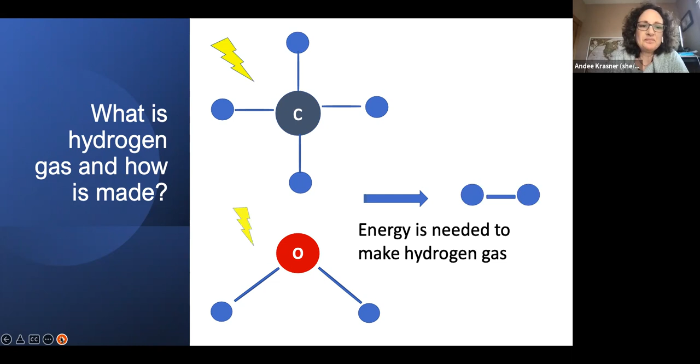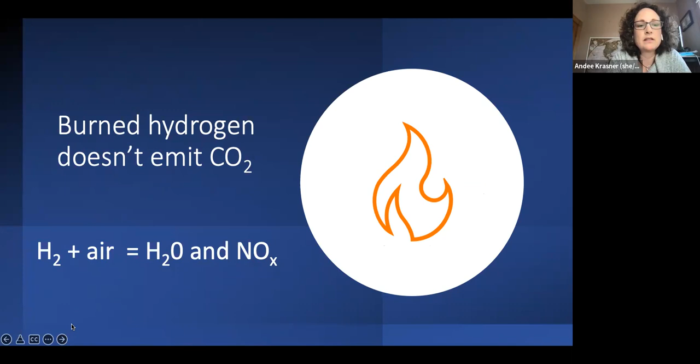So when you burn hydrogen, it actually doesn't emit any carbon dioxide. So hydrogen is often called a non-emitting fuel because it doesn't emit any carbon dioxide. But when it is burned, you get byproducts of water and nitrogen oxides. So while hydrogen doesn't produce any carbon dioxide, that really isn't the whole story. The way in which hydrogen is produced is really where the emissions come from. And so it can be produced in a clean way and it can be produced in a dirty way or from fossil fuels.

So there's three main pathways to make hydrogen gas, and hydrogen is named differently for each method of production. We're going to talk about gray, blue, and green today, but there's a lot of different colors. There's pink, there's yellow, there's brown, there's turquoise. We're going to stick with the three main ones, gray, blue, and green.

So gray hydrogen is made from methane gas using a process called steam methane reformation. In the steam methane reformation, methane reacts with steam under pressure to produce hydrogen gas, carbon monoxide, and carbon dioxide. This process obviously requires continued use of methane, which when leaked into the atmosphere has a very high global warming potential. Over a 20-year period, methane's global warming potential is 84 to 87 times more warming than carbon dioxide.

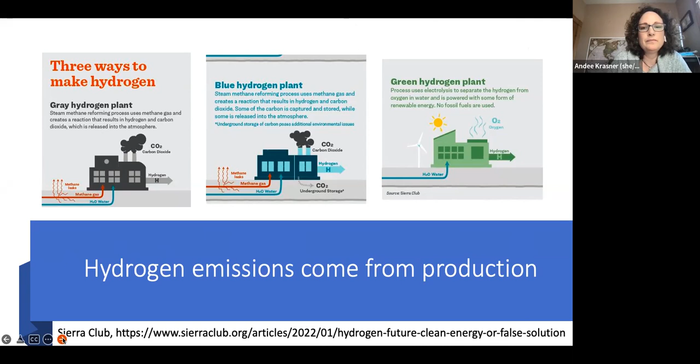So here's the problem. 99% of hydrogen produced in the US is made from fossil fuels. And while we are very excited that more green hydrogen is in the pipeline, it just isn't available yet. And when it does become available, it will be incredibly precious. It's the energy equivalent of caviar or gold. And so we need to make sure that we use it in a very specific way.

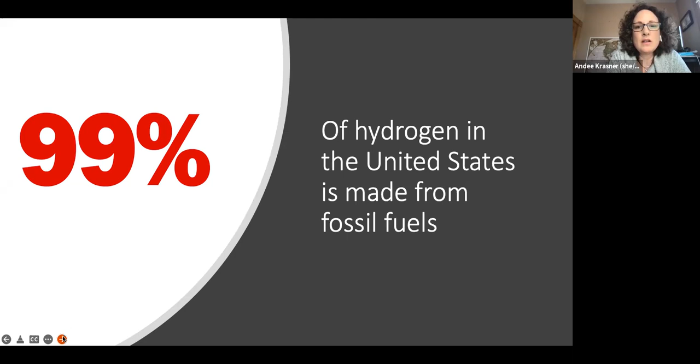Next slide. So before I started learning about hydrogen, I did not know that we produce so much hydrogen in the US already. We produce about 10 million metric tons of hydrogen every year in the US, and it's a key ingredient in fertilizer, which makes ammonia, which is the nitrogen with 3 hydrogens on it (NH3). So it's ammonia, and it's made from hydrogen gas.

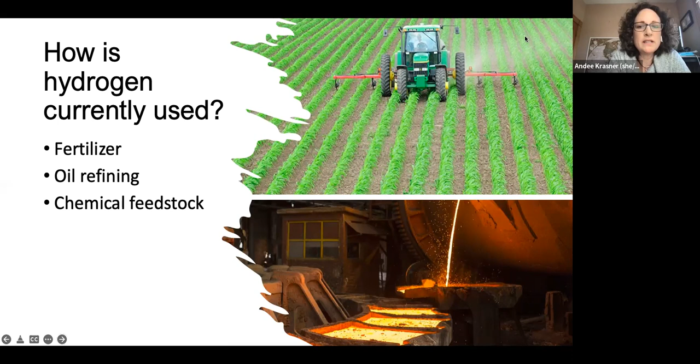It's also used in oil refining and as a chemical feedstock for other important things like methanol, which is then in turn used in a ton of different products like plywood subfloors and solvents and windshield washer fluids.

Next slide. So the carbon impact of the hydrogen that we make worldwide is 830 million tons of carbon dioxide equivalent per year. This is the same amount of emissions as 2 Californias. And California is the 6th largest economy in the world. So this is a lot of carbon that hydrogen is already impacting our climate with. Next slide.

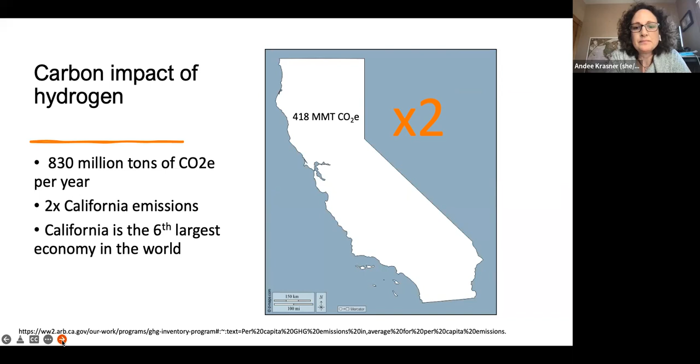So just to put it into context as to why gas utilities want to use hydrogen, there's mounting pressure on gas utilities to reduce carbon dioxide and fugitive methane emissions to meet both international and national climate targets. As you may recall, the US rejoined the Paris Agreement, and as part of that committed to reduce methane emissions by 30% by 2030. And the latest IPCC report stated that we have to reduce fossil fuel use quickly, and they named methane as a really important gas to focus on.

And in some states like California and Massachusetts, states have emission reductions mandates that fossil fuel companies and gas utilities are having to figure out how to be in line with. Next slide.

So gas utilities basically have a lot of pipes in the ground, and they deliver gas to us, and their job is to deliver it as safely as possible. So when they're asked to reduce their carbon impact, they're looking at ways to leverage their current infrastructure using the pipes that they have in the ground.

And what they are proposing right now, at least in Massachusetts, is to use biogas, which is methane, to use synthetic gas, which is gas made from hydrogen, and it's methane, and then to use hydrogen to reduce their emissions.

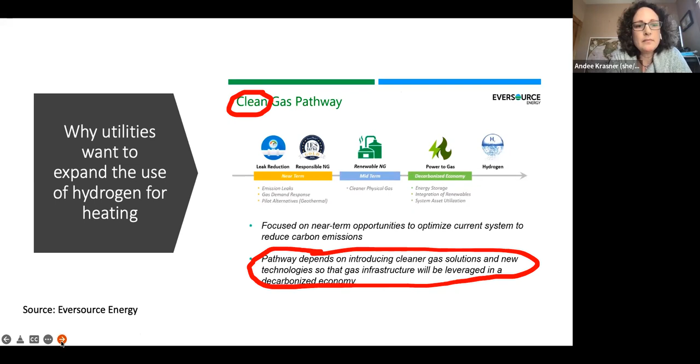So I'm going to talk to you about the impacts of using fossil hydrogen in our natural gas system. Basically, it's going to increase greenhouse gases. It's going to lock in the methane gas system. It will waste renewable energy, and it will increase costs for consumers. There are safety concerns about putting a highly explosive gas into people's homes and into people's businesses. And it will perpetuate health inequities from air pollution that comes from the methane gas system. Next slide.

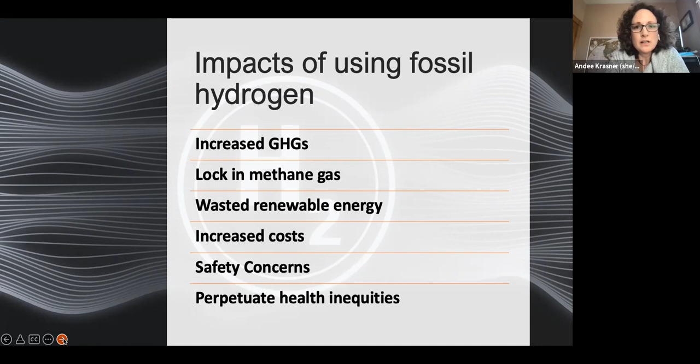Furthermore, when you use hydrogen in pipelines, it embrittles them, it makes them hard, and that makes them more likely to crack. And so we're going to get more and larger cracks, which means more leaks of methane in our system. So we already know that our gas system is leaking all over the system, and that it's leaking worse than what's reported to the EPA. So we don't really want to put hydrogen in these pipes where it can cause additional leaks. Next slide.

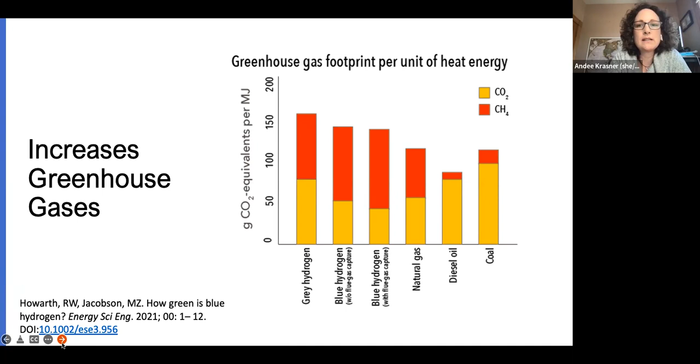So it's going to be blue hydrogen in the best case scenario, and gray hydrogen in the worst case scenario. We are going to increase that demand for fossil hydrogen, and that in turn will increase the demand for the methane needed to make that fossil hydrogen. So you need about 1.3 times more methane to make hydrogen to deliver the same amount of heat. We're also going to maintain our current system, which is 80% methane in the pipes. And the public will be assured that methane is fossil-free energy, or they'll be assured that it's decarbonized because hydrogen doesn't emit carbon when burned.

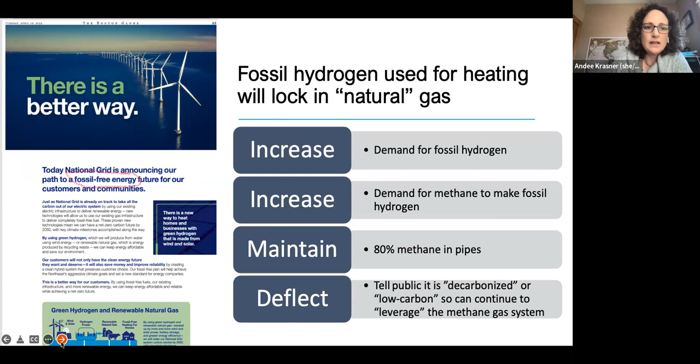But these are really just sleight of hand, doublespeak for hiding the reality behind what is happening when you mix methane with fossil hydrogen. Next slide. So green hydrogen is pretty great. Why isn't it an option for blending with methane for heating and cooking? And we're specifically talking about blending it for heating and cooking. There are other great uses for green hydrogen. Remember, I said it's like caviar, and we're going to talk about that a little bit more. Next slide.

So like I said, there's no green hydrogen available. Less than 1% of all hydrogen is green right now. The US government is trying to ramp up the availability of green hydrogen and bring down its price to $1 per kilogram by 2030. But even those projects that are planned won't have enough green hydrogen to use for heating until 2040 or beyond. So if we use renewables to make green hydrogen, there can be a trade-off. Those renewables don't get used to green the grid. So we need to build a lot more solar and wind to get to a zero carbon economy.

And thirdly, even if we had enough green hydrogen, you can only blend it up to 20% safely. After about 20%, the appliances which were designed to burn methane have to be replaced or retrofitted. You have to have appliances designed to burn a blend of hydrogen and methane or 100% hydrogen. So you're going to have to replace all of these appliances. Next slide.

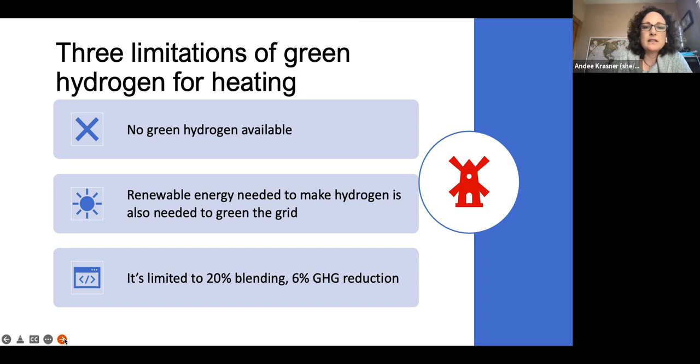So let me explain the 20% blending issue a little bit more. Hydrogen has the highest energy content by weight of any fuel, but it has a comparatively low density. So it requires greater physical volume for the same energy as other fuels. So that means when we actually replace 20% of volume of methane with hydrogen, it actually has less energy content. It's only about 7% of the energy content, even though it's 20% volume.

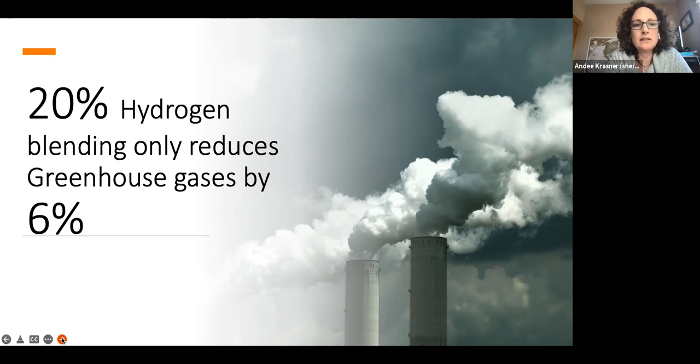And the difference in this density also means that there's not a linear relationship between volume and greenhouse gas reductions. So it sounds like a large blend, a 20% blend, but you're actually only getting at most 6% reduction in greenhouse gases. And that's probably less when you consider the additional leaks that you're gonna get in the pipelines. Next slide.

So once we get to more than 20% blended hydrogen, we either need to switch to electric appliances or we need to switch to hydrogen. And when we're thinking about hundreds and hundreds of buildings, efficiency becomes very important. So when we look at efficiency, we find that the same unit of renewable energy is used 5 to 6 times more efficiently than hydrogen. And what this means is that we build less renewables to power the same number of buildings if we're using more efficient appliances.

So remember when I said green hydrogen is like caviar, and using it to blend with natural gas is sort of like throwing caviar in soup. We have better ways to use this green hydrogen and the renewables from which it's made. It's better to use these renewables for electricity for powering heat pumps. And the pace of renewable installation will be insufficient to meet both the increased demands of electrification and putting hydrogen in pipes. Next slide.

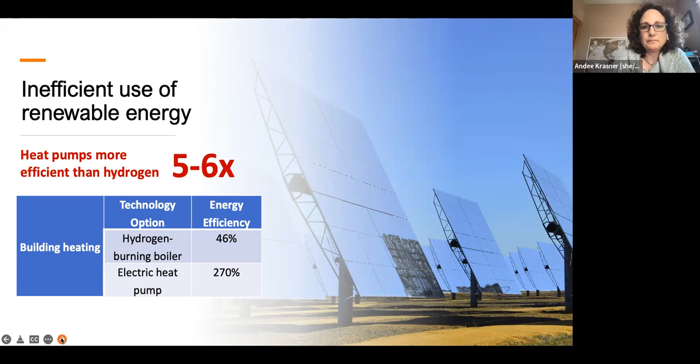So people who are engineers and know a lot more about hydrogen than I do put together this really nice ladder. At the top of the ladder are basically unavoidable uses of hydrogen that we absolutely need to use it for. You can see fertilizer is at the top. And then you can see things like long haul aviation, shipping, and steel. At the bottom is domestic heating.

So why are gas companies all over the United States pushing hydrogen if it's not really a great use of it? Well, in the end, it helps their bottom line to expand the use of hydrogen, which is really only used in industrial sectors now, because, as I said before, it increases that demand for the natural gas, which is used to make it. Next slide.

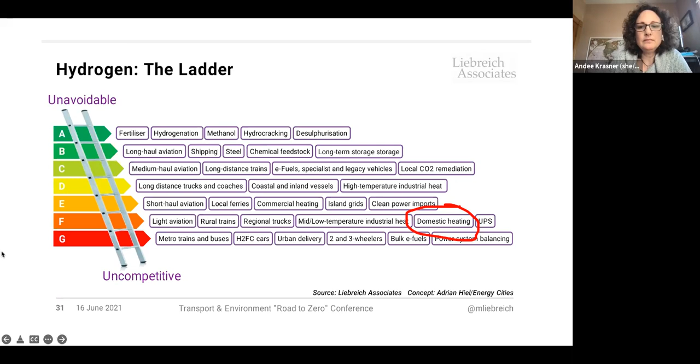So hydrogen is much more expensive than methane gas, and it always will be, because gray and blue hydrogen are made from methane, right? Gray hydrogen is the least expensive, but blue hydrogen, where you have to capture the additional carbon and store it, is more expensive. And currently green hydrogen is the most expensive. So if we start blending hydrogen, it's going to increase consumer costs.

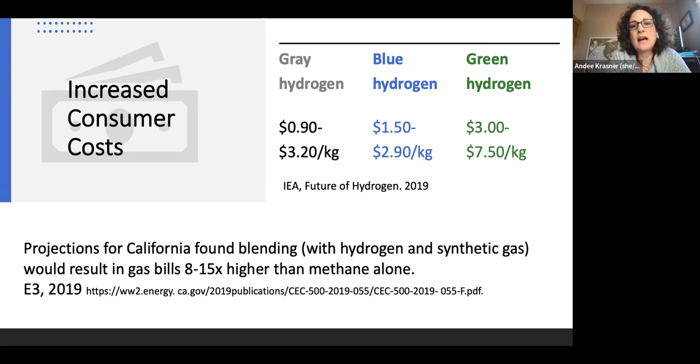And it's not just the gas itself that's more expensive. You have higher delivery costs. The energy of pumping a lighter gas is significant when you start needing to move that gas across the country. And that can make the cost of gas bills 8 to 15 times higher than methane alone if you were to blend hydrogen or synthetic gas, which is made from hydrogen. Next slide.

And like I said before, with blends above 20%, consumers are also going to be on the line for replacing all their appliances because they can't burn blends above 20%. Next slide.

So the thing about hydrogen is it ignites a lot more easily and it's much more explosive than methane. So we're going to blend it and we're going to pipe it into people's homes. And the gas companies are saying that they can do this safely, but there's a lot of infrastructure that has to be put in place to actually use hydrogen safely. So when you go beyond 25% hydrogen in fuel, in most places in the world, you're no longer going to be able to use the same equipment.

Electronics, for example, have to be explosion proof. And there should be no sparks, because hydrogen ignites with almost any air to fuel ratio. I just can't imagine a kitchen or a household with no sparks whatsoever. I mean, just think about lighting birthday candles for children. Next slide.

Go ahead and push play on this. I'm going to try to show you what a flashback is. One of the problems with hydrogen is when you blend it with methane, it increases the risk of a flashback.

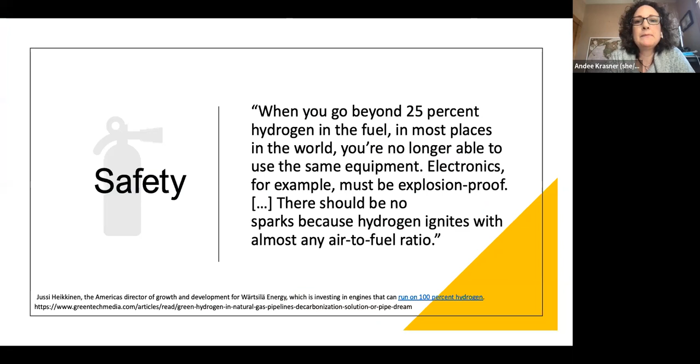Basically, what happens is the flame is just quickly extinguished, but the gas continues to flow. And the flashbacks can lead to appliance shutdown, damage to appliances, and they're a safety hazard because the gas leaks in enclosed areas. So because hydrogen can ignite at almost any air to gas ratio, a leak could mean a fire or an explosion. Next slide.

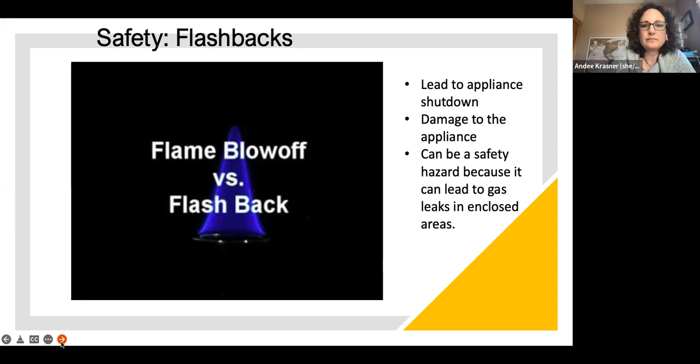So the other thing about a 20% blend of hydrogen is that it still is 80% methane, and burning fossil fuels in the residential and commercial sector right now is responsible for $205 billion in health impacts. These are in premature deaths. The authors of this are from Harvard, and they did not include hospitalizations or any additional medications that people may have to incur.

Sorry, I'm getting a call and my computer is just making everything go away. Just 1 second.

So anyway, you can see that the costs of continued use of the methane gas system are substantial to health. Next slide.

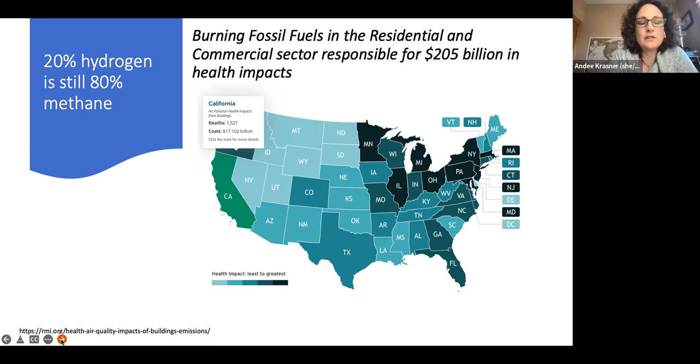Hydrogen will also perpetuate existing inequities. Communities of color are disproportionately exposed to air pollution from buildings. They're actually exposed to air pollution in almost every sector except for agriculture. And what this means is that because they're exposed to high levels of pollution, they also disproportionately get sick from air pollution and are likely to miss school days, work days, and have underlying illnesses associated with this pollution. Next slide.

Hydrogen will increase nitrogen oxides and perpetuate these existing inequities. Nitrogen oxide is one of the main air pollutants from steam methane reformation. So as production of hydrogen ramps up, so will NOx. And when burned, hydrogen releases 6 times more nitrogen dioxide than methane alone. So as the blend rates increase, nitrogen oxides are expected to increase.

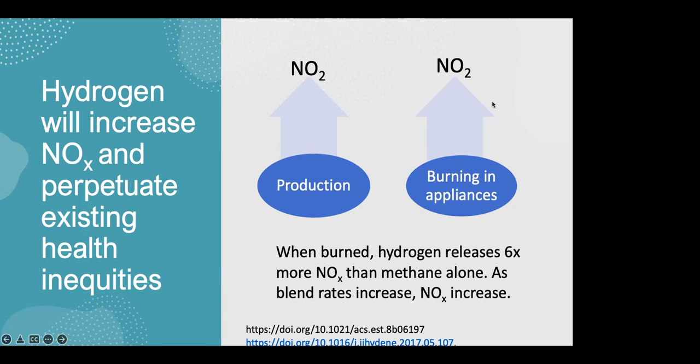And as you may know, nitrogen oxides are a precursor to particulate matter and ozone, which are associated with worse symptoms of asthma. So we don't know specifically how hydrogen blending will affect indoor pollution from gas stoves. Those studies are still ongoing, but we do know that with the limitations on hydrogen blending, 80% of the gas will be methane and just perpetuate the existing inequities that we have. Next slide.

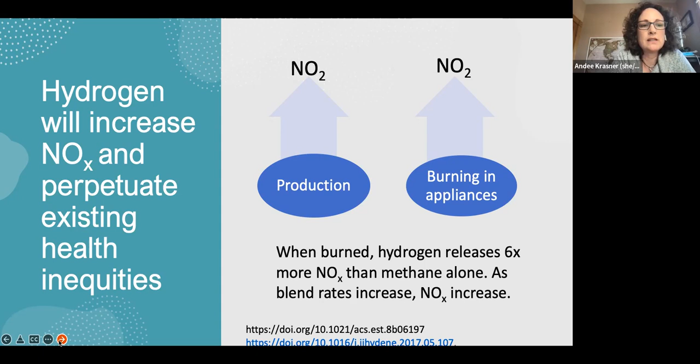Climate change, health inequities are also magnified by climate change, and making the reductions in greenhouse gases is just a necessary element of our pursuit of health equity. Next slide.

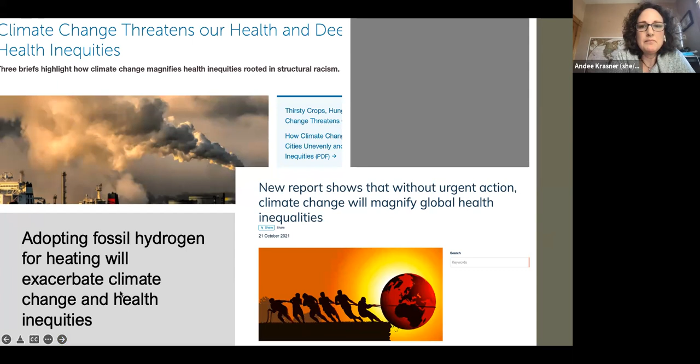So the most cost-effective, healthy, lowest emission path is to use green hydrogen for hard to electrify industrial processes and to invest in electric options like heat pumps for heating and cooling. Next slide.

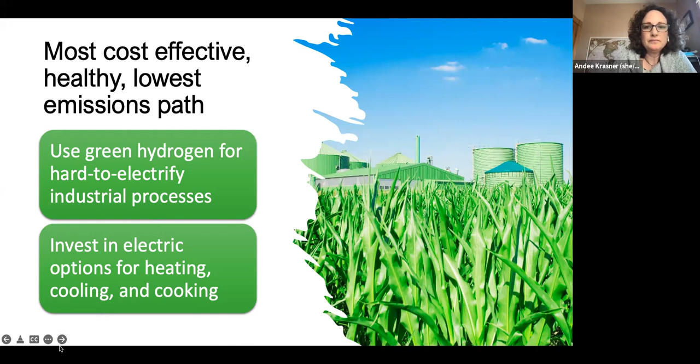So these are just some policy recommendations. We want to promote and expand electrification and the direct use of renewable energy to heat buildings. We want to require environmental impact assessments, comprehensive health impact assessments, and cost effectiveness analysis of new hydrogen infrastructure in comparison to clean energy before it is installed, and require accounting of the full life cycle greenhouse gas emissions of fossil hydrogen, and require the certification of green hydrogen and reserve green hydrogen for difficult to electrify industrial purposes.

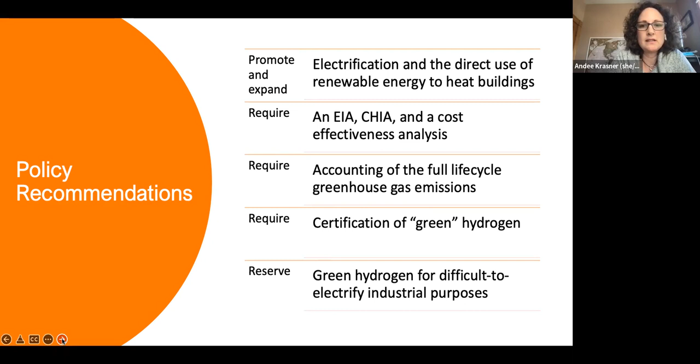Next slide. So thank you for listening. This is my first time giving this presentation, and so it'd be really helpful to me to hear what you found confusing and what you found helpful, so that I can continue to improve on this presentation, and also just to answer any questions that you have. And then afterwards, I will give you a presentation about the GeoGrid, which is a different future that we can envision for the gas system, and one that's a little less explosive and also healthier.

Yeah, sorry. I was trying to find a way to get off mute. Thank you so much for that.

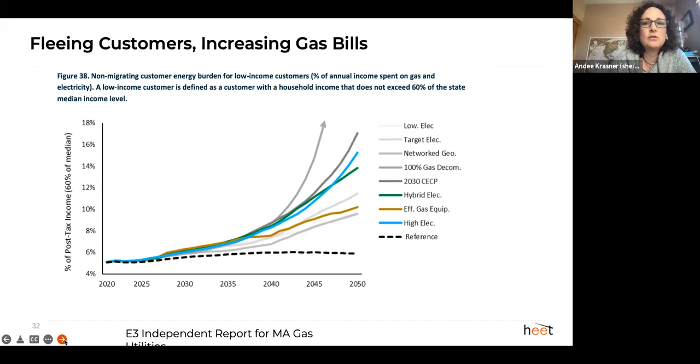And from then on, gas customers will basically flee faster, increasing costs further. And in the end, the only ones left on the gas system will be those who cannot afford to switch to electric heat pumps. Next slide.

So we need something that will safely deliver decarbonized heat at the same or lower cost than gas is now. That isn't hydrogen. Like I said, hydrogen is much, much more expensive than natural gas. So we know that air source heat pumps are much more efficient than gas, and ground source heat pumps are more efficient than air source heat pumps, and networked ground source heat pumps are even more efficient. So they're about 6 to 8 times more efficient than gas.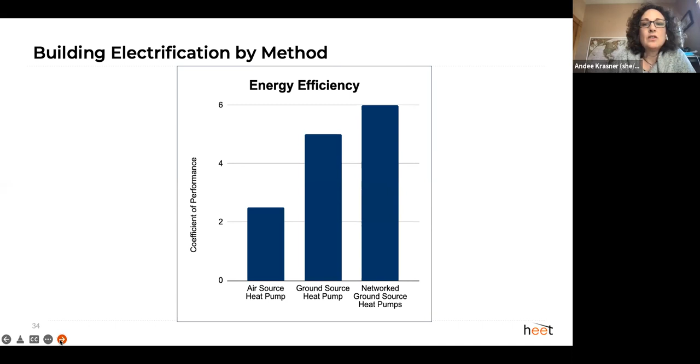These systems can radically reduce the impact on the electric grid as we move buildings to electricity, as well as the amount of renewable energy we need to build in order to power these heat pumps. That means the electricity will actually cost less as well. Next slide.

So this is the GeoGrid. It's hard to see, but basically what you'll see is that, like the gas system, the infrastructure is in the street. So those purple lines, those are service lines going to each building. And there are boreholes attached going down just a few hundred feet. The pipes are filled with plain water, and the heat pumps in each building pull off heating or cooling that buildings need from the water. So all components are also all made in America.

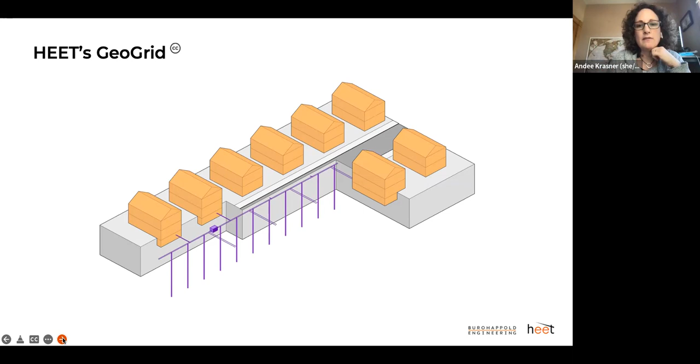And for those of you who don't know how heat pumps work and why they are so much more efficient than a gas boiler, it's because they take heat out of the air or the ground and they move it from one place to another. Because they're not actually creating heat, they're just moving it from one place to another, they can be very, very efficient. Next slide.

So an engineering firm, Buro Happold Engineering, they were the engineers for New York City's 80 by 50 plan. They did a feasibility report to look at how much energy the GeoGrid could provide. And they found that this system with boreholes 500 feet deep, spaced every 20 feet down the street in the gas company's right of way, just like our gas system, could meet nearly 100% of the energy demand on the street, including cooling and heating. Next slide.

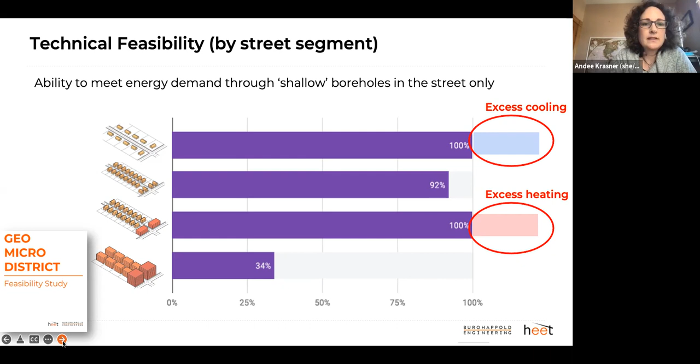So sharing energy is really important. The network heat pumps have an advantage because they can share this energy. So imagine the supermarket with its fridges that are humming away through the winter. They're expelling a lot of heat. That heat can be shared and warm the water that can be used by nearby homes. And in the summer, the heat from the homes or buildings can be expelled and moved back down into the ground and stored for winter. Next slide.

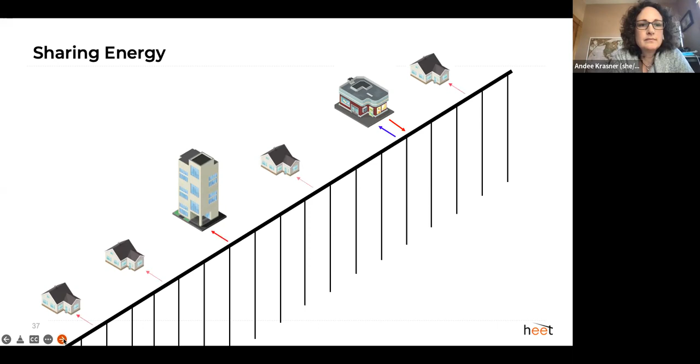Wait, here we go. Sorry. That's all right.

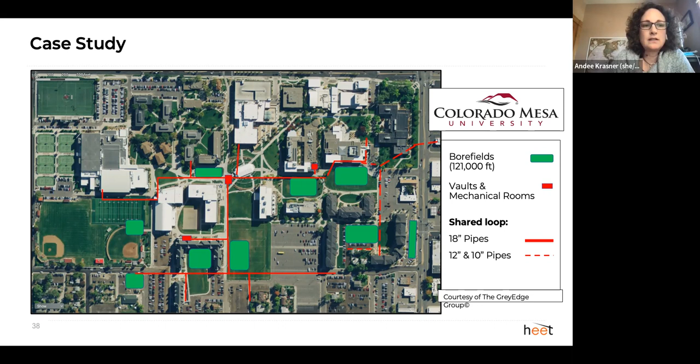How do we know that this works? So there's a variety of case studies across the country and a number in Europe. And this is a picture of Colorado Mesa University. Their 4 systems are interconnected and serve 1 million square feet of buildings. As with the GeoGrid, they can interconnect like Lego blocks. These systems have been interconnected over time. And they have a gas boiler for backup should they need to heat water because there's not enough heat from the ground. And it has never been used in the 12 years of this system. Next slide.

So I'm just going to talk about the benefits of the GeoGrid in comparison to both the methane gas system and hydrogen. So the pipes contain only water, so it's much safer than natural gas. There are no gas leaks and there are no explosions. Next slide. It offers resiliency for homes because it provides cooling. The great thing about heat pumps is that they deliver some of the most efficient cooling that you can buy. And we're going to need this as our future gets warmer and warmer. Next slide.

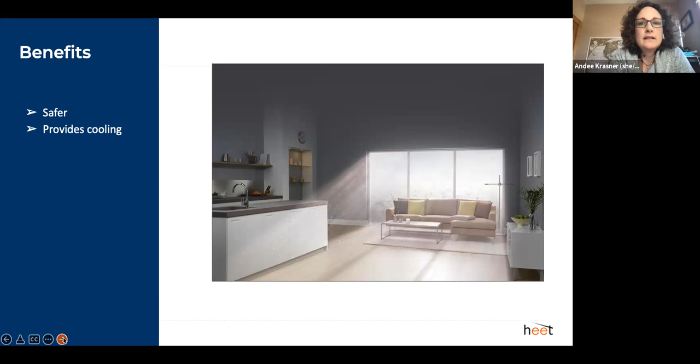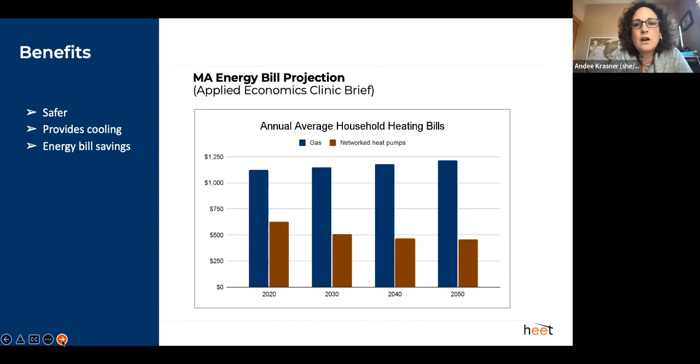We actually get lower energy bills instead of higher energy bills. So the cost of the fuel is about 50% of your current bill. With the Geo system, there's no gas, so that cost is gone. And you can see that really the costs are in installing the pipes and drilling those boreholes, those upfront costs. And those are amortized over decades, the same way that the gas system is. So in the end, the network heat pumps are actually less expensive than replacing the gas system. Next slide.

We cut greenhouse gas emissions immediately. The production of electricity used is the only source of emissions associated with the system. So you need electricity to run the heat pumps. In Massachusetts, our grid fuel mix is getting cleaner every year. So every year, the GeoGrid gets cleaner in comparison to gas, which would stay the same over time. Next slide.

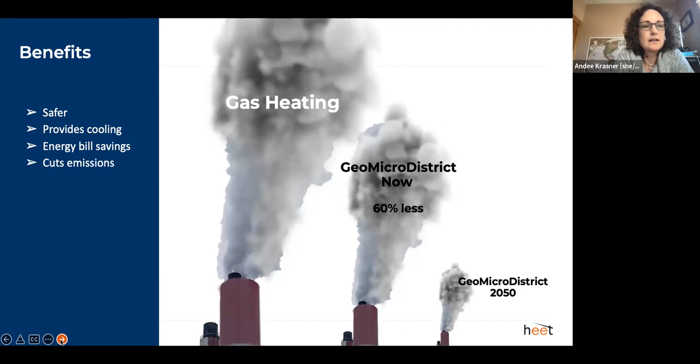This is a much more equitable way to get everyone the heat pumps they need. If the heat pumps are installed by the utilities, the cost of the installation would be spread across all of us over decades, delivering renewable, safer, lower cost energy to us all, not just those with the upfront money to buy an air source heat pump. Next slide.

Retraining is easier. All those people who currently work for the gas companies can continue to work for the gas utilities, but instead of being gas utilities, they'll be heat utilities. So since the water pipes running up and down the street are the same type of pipe, it's easy to retrain, and it's a lot safer because they don't have to worry about explosions. And this concept is supported by labor. Next slide.

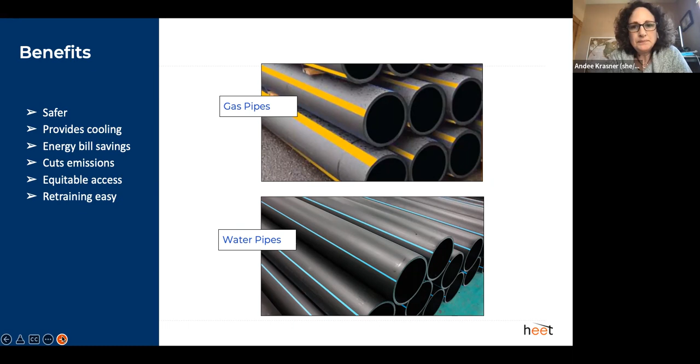It's also healthier, so you don't get indoor air pollution from gas stoves, which are bad for children. You don't get outdoor air pollution from venting all of the air pollution out of the homes from gas boilers. So indoor and outdoor air is healthier. Next slide.

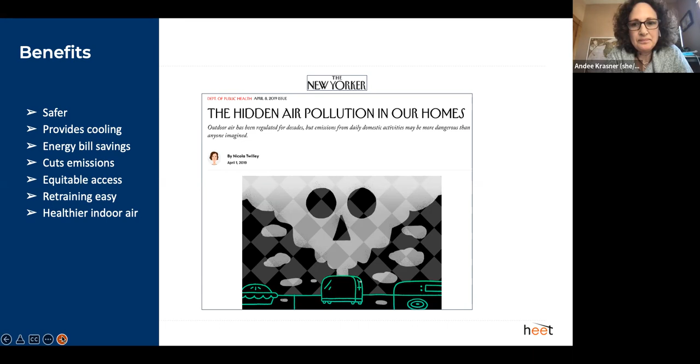There's demonstration projects in Massachusetts and New York, and HEET has convened a research team with Harvard, MIT, and 2 national labs to collect data to share about the health benefits, the energy saving, and how it can best work in different settings. And next slide.

If we're successful, all these potential fossil fuel installations could be seed sites for the geogrid to grow out from. Remember, it can be like Legos. So you can create a connected thermal grid, moving all of us to safer, lower cost, more equitable, renewable energy. And this can solve the problem at a speed and scale we desperately need, wasting the least amount of money and time, replacing the old infrastructure with something that we can use for decades to come.